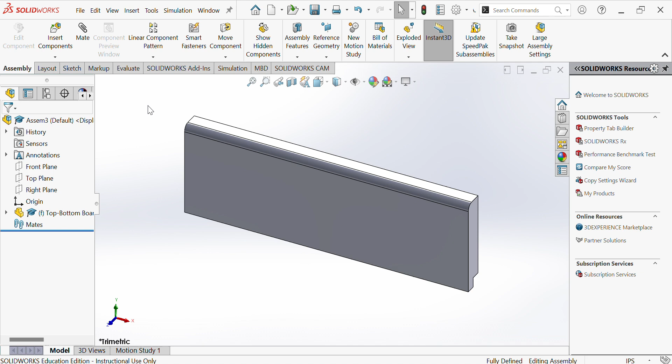Our next component is going to be one of the side boards. When we place this sideboard, we want to put it on the left side. Notice if I look at the back side, the cuts match up on the correct side.

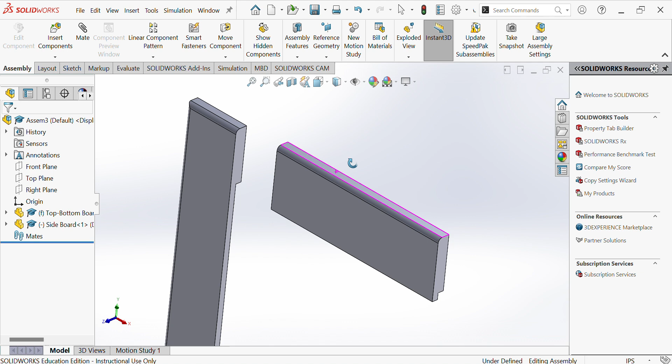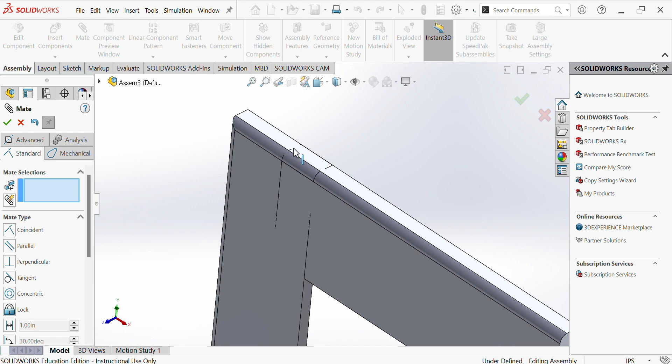So whenever we do assembly, we always want to assemble with three mates. I'm going to start this mate by making the top parts at the same height, check mark it. Then I'm going to select the front faces of both boards and get those lined up. And the last one is I'll do this top line and this top line, and check mark it.

You can do any three mates that you would like. Those are just the ones I did.

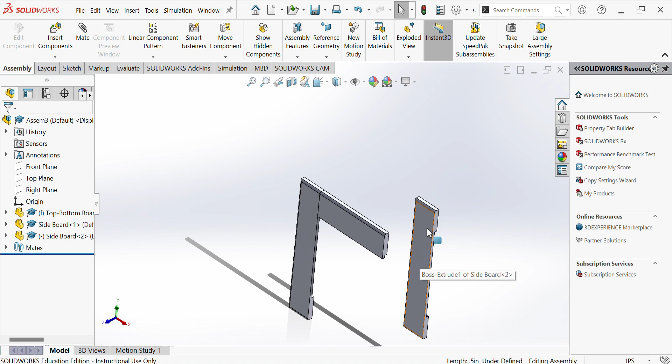Now I'm going to insert the sideboard again, this time for the opposite side. But notice the cut is on the opposite side of where it should be. So I'll take my mouse, put it underneath that board, right click and hold, and rotate it until it's close. You won't get it perfect and you don't have to, but try to get it oriented close to where it should be.

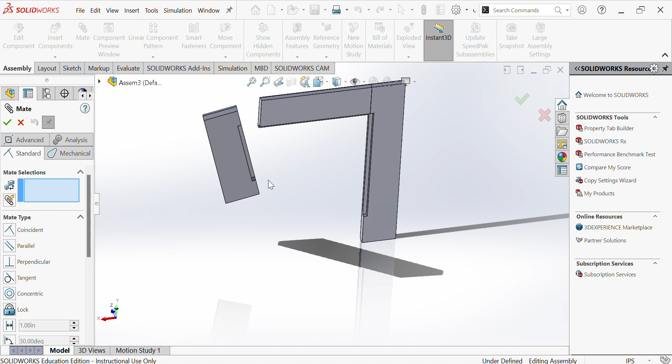That's close enough. Now I want to do three mates again. Remember, you can do these mates any way that you want, but make sure you get three. So I'm going to do those two faces, get them lined up, check mark. I get my top face here and this top face lined up so it's even. And now I'm going to connect the two points, or two lines. That's three, check mark it.

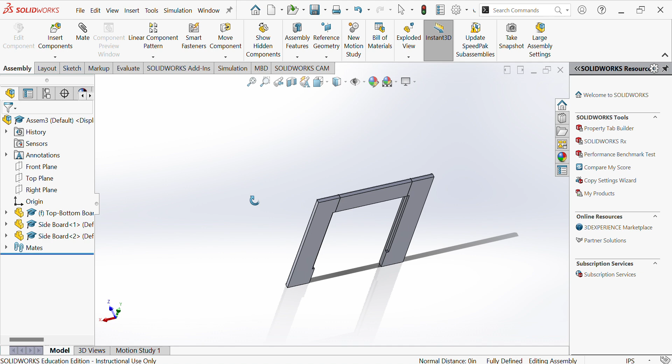Now I just have the top or the bottom part of the frame left to do. I'm going to insert that board. And this one's upside down again, just like the last one. So I'll right click on it and hold, and rotate it until it's close to where I want it.

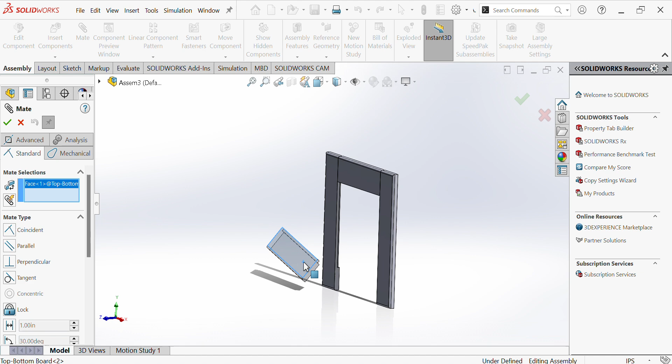Once I get it close, then I can focus on my three mates. I'm going to do face to face. If you do not get those three mates, what will happen is on your next mate, it may move a part that you're not even trying to move. So make sure you get three so it locks it in place.

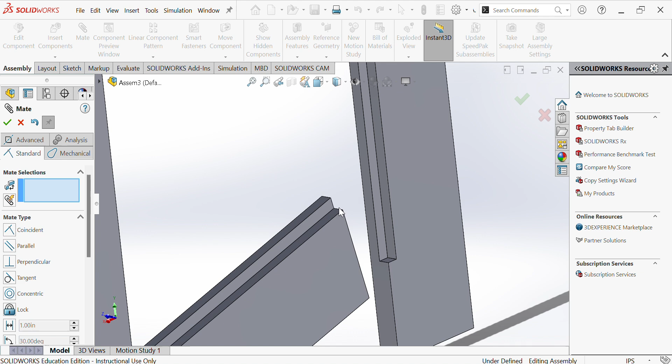So I'm going to go to the back side here, and I'm going to mate this line and that line. There's two. And I have one more left, and I could do many different things, but I want to go with these two pieces there, and that's three. So I have my frame put together.

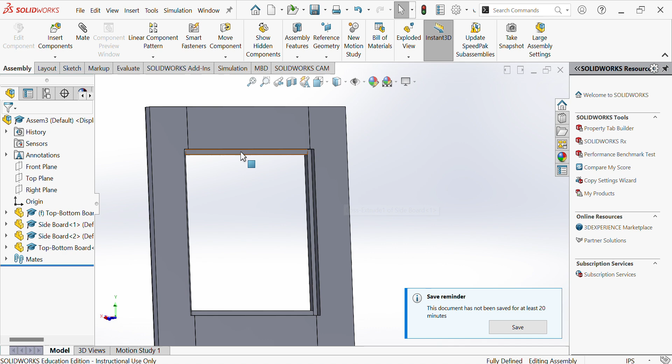Now I'm going to insert my mirror into this slot here. My mirror is a quarter inch smaller than that opening, so I'm going to offset it an eighth inch all the way around. We're going to learn a new function when we do this mate.

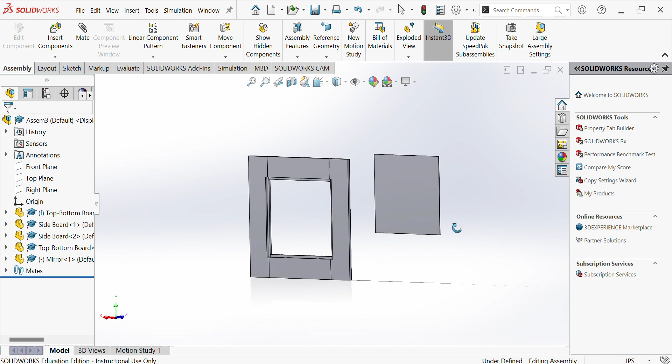So I'll hit insert components and select mirror. When I place that mirror, I want this front face to be touching against this groove here. So that's going to be my first mate.

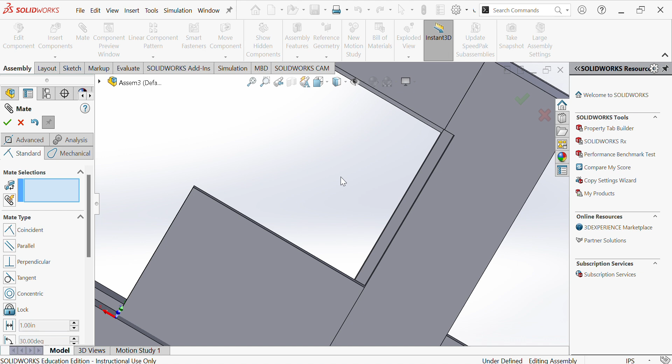Now it's right against it. So now I need to mate it up and down and left and right. I'll start with up and down. This top part of the mirror, that face, should go all the way up to this top here, but an eighth inch down. So when I select those two, they touch.

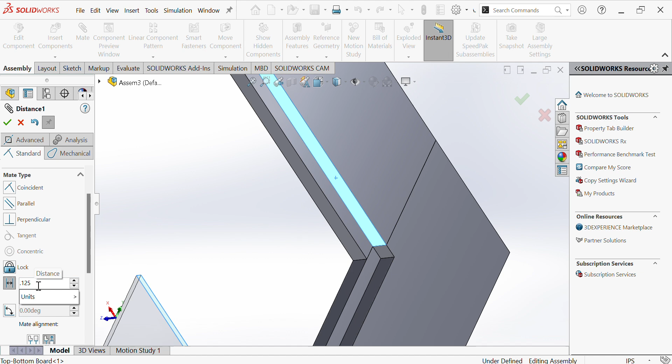I want to go down on the left side here, and you see these arrow buttons, left and right. I select that, type in 0.125, which is an eighth inch. You can see that it's an eighth inch away. So up and down is now done.

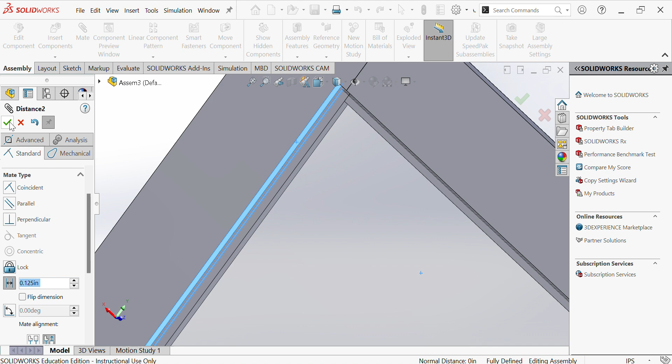Now I need to focus on left and right, doing the exact same method. I select the face, and that face should move to touch there. I don't want it touching completely. I want to set it an eighth inch away, so I go down to the arrows again, click it, type in 0.125, check mark. And now I check mark again and finish my mate.

Now if I look directly at the back side, you can see how that mirror sits an eighth inch away all the way around. At this point, you are done, and you want to save your file as your name, mirror, assembled.